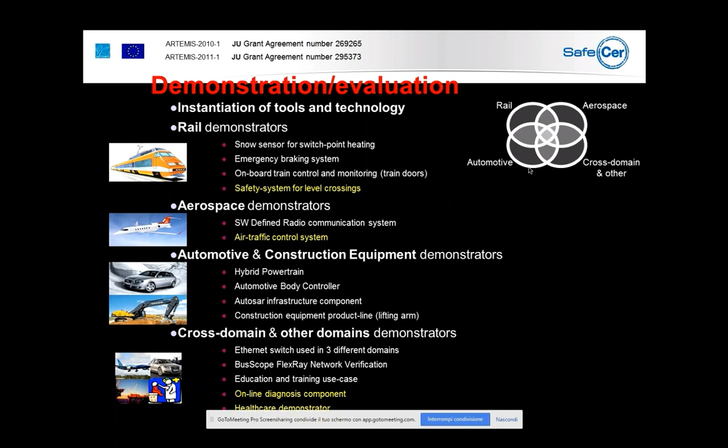I have a question - you said that the tools, CTF and CAR, are not going to be part of the AMASS project, and won't be included as background. Yes, that's right.

Because we think that the results obtained in the SafeCer project were not, I don't know how to say, but we think it was not sufficient or enough results about these two technologies in order to elaborate some improvement or adaptation in other frameworks. I don't know the opinion of the others, but we have alternatives to provide tool support for traceability or process compliance and consistency, and we think we can go with other solutions.

Okay, it was just to clarify it. Okay.

I don't know if the other SafeCer partners want to add something about this aspect, because I understand that SafeCer had an important role here, but I think it has also been discussed during the AMASS proposal that CTF and CAR will not be introduced or added as a baseline for the AMASS reference architecture.

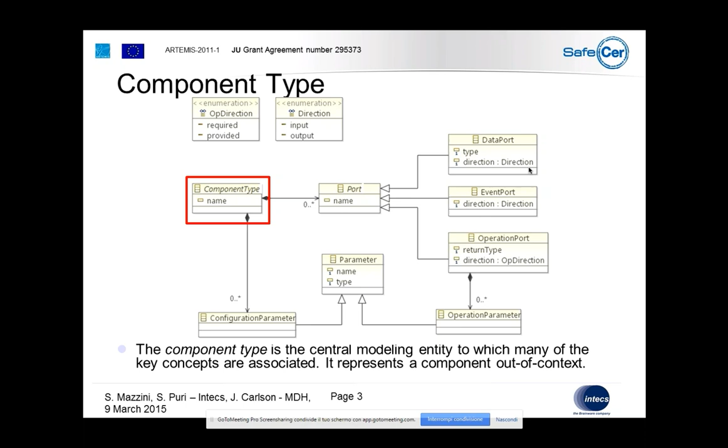Here we have defined that the component can have ports. This is important in order to be able to model a component out of context. Each port represents a specific interaction point. And then the component can have some configuration parameters in order to model some variability in its functional dimension.

Then we have the concept that a software component can be decomposed into subcomponents, where subcomponents can be seen as an instance of a particular component in the context of the parent component. So, for instance, here you can see that a composite subcomponent, which you can think of as an instance, can have some value for the configuration properties we have seen before, in order to fix some variability that has been provided through the configuration parameters of the components.

And then the subcomponents inside a given component type can be connected between them by using the defined ports. In the component model, we define the concept of system, which is basically the system under design, made by the software and the hardware platform.

We also address the fact that the system can be modeled at different abstraction layers. So, for instance, the system at a higher abstraction layer can be defined as a collection of functions, where each function can then be realized by a given component.

Here in this slide, we see that actually when we talk about component system, we talk about component instance. So, as I said before, the system is designed by reusing existing components defined out of context. So, in order to build the system, you take the component type, instantiate it, and connect the different instances together in order to build the software for the given system.

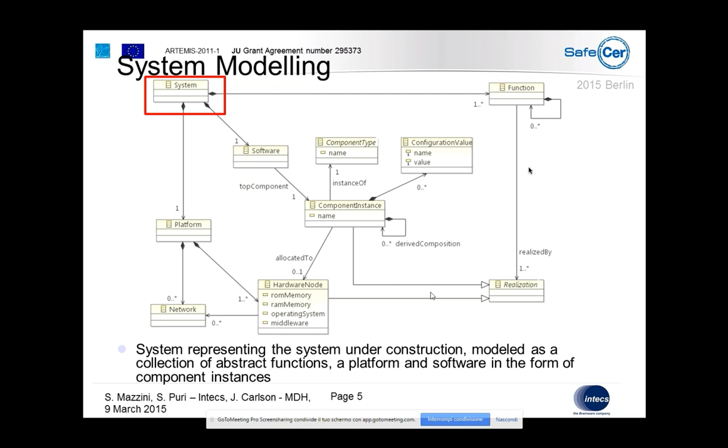In SafeCer, we made a distinction between strong assumption contracts and weak contracts.

So regarding strong contract, if a component has a strong contract, then in order to instantiate a component in a system, the strong assumptions must hold in order to use the component. So the assumption makes some constraint about the environment where the given component can operate. If the assumption provided to the contract are not satisfied by the given environment, then the component cannot be instantiated in that environment.

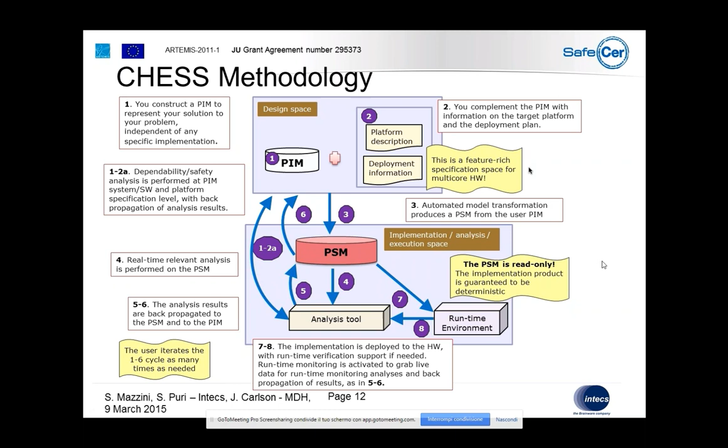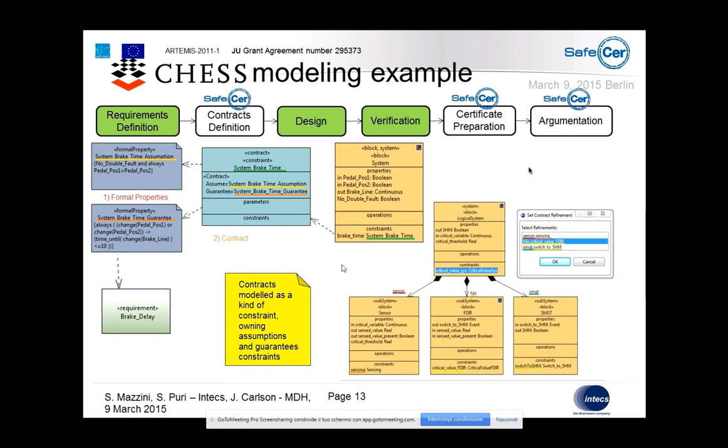And so we support different modeling steps. And also in SafeCer we added the possibility to integrate with the OCRA tool from FBK in order to perform some formal verification from this contract. About this verification we will see in a presentation later.

So the idea here in CHESS is to cover all the process steps foreseen by the SafeCer process, which besides the standard process steps, foresees other process steps for the contract definition and also certification argumentation preparation. And so our approach is to use this tool in order to support all these steps. Okay, then we had future work in order to extend and make more formal reasoning about the contracts and the argument fragment, and so this is something that I think is also very interesting in AMASS.

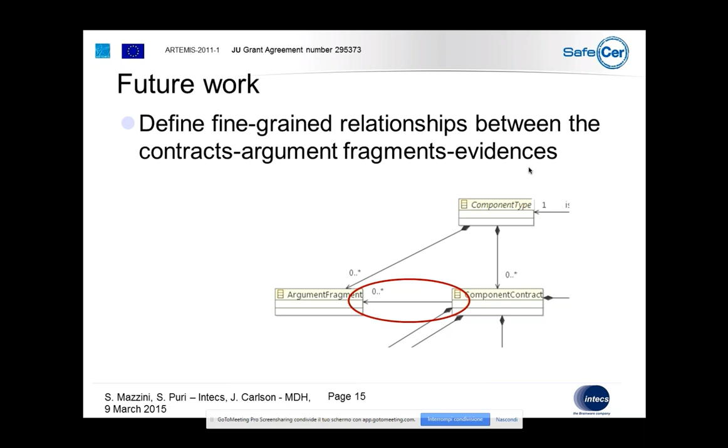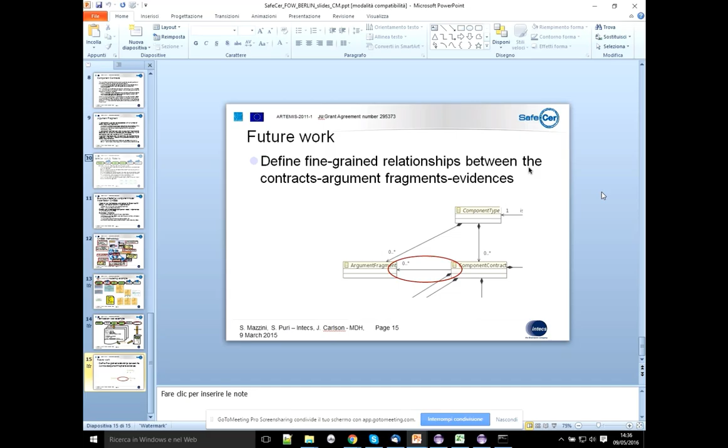Hello? Yes, this is Wesker. Just to understand your approach for implementation of this meta model, what I understand is that this meta model is your conceptual model, right? It's not the way you exactly implement it. Because you say that you implemented CHESS, and I understand that chess is based on Papyrus. Papyrus uses the profile mechanism.

Yes, right. In fact, they say the SafeCer component model is a representation of the information needed. Then, in order to work with it, we rely on existing component models. For instance, the one we have in chess, which has been extended. That is, as you said, based on UML and MARTE profiles. Other component models were used in SafeCer in order to directly use the SafeCer component model. So, for instance, in chess, or the way you use chess in SafeCer, have you extended the existing profiles?

You say that you are using the Marte profile. Yes, UML, but Marte. Have you extended Marte? Have you modified these profiles, or are the existing profiles okay for you, or do they cover your conceptual model?

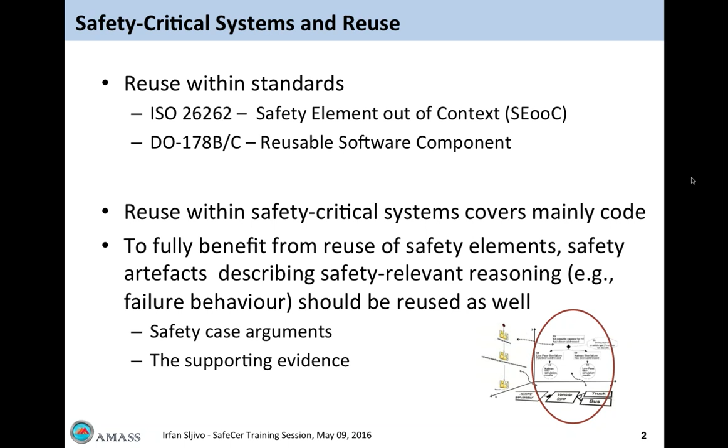If we take a look at the example that we worked on within SafeCer, safety element out of context within wheel loaders: we had a family of wheel loaders, and each of those wheel loaders has this lifting arm that can perform up and down movements to move load and so on. Because it's a great family of products, these products work in many different environments and have many different safety requirements associated with them. So we considered the use of this lifting arm automatic positioning software component, which as an operator you press a button and then the arm will go to a predefined position.

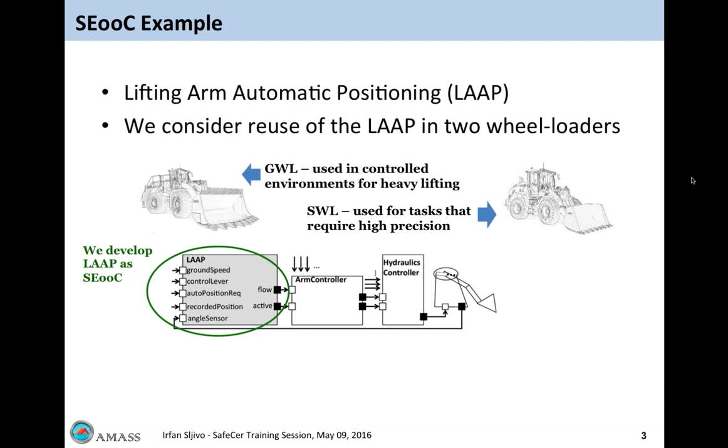So if we want to develop this component as a safety element out of context, what the standards say is we need information related to the system design, and the functional safety concept shall be assumed, considered, and validated. So it means that we will make some assumed safety requirements based on what we know about where this component will operate. We will consider those assumed requirements when designing our component, and once this component is being reused in one of the systems, then those assumptions need to be validated in order for the component to be able to integrate into the system.

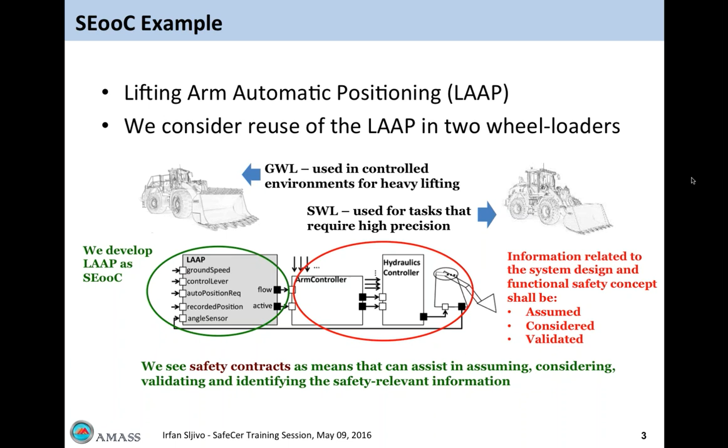So to achieve this, we see safety contracts as a means to do so, to capture what we assume, get the guaranteed behavior based on those assumptions, and then later use the contracts to check if those assumptions hold when the component is reused.

When we look at these out-of-context reusable components, they're developed independently of the system, but they're also developed with configurable parameters, which means they have different behaviors based on the values of those parameters in different systems.

That's why we have, as Stefano introduced, this notion of strong and weak contracts, where strong contracts are the ones that should be satisfied in every system, in every context, while the weak ones are context specific—only when required are they needed to be satisfied.

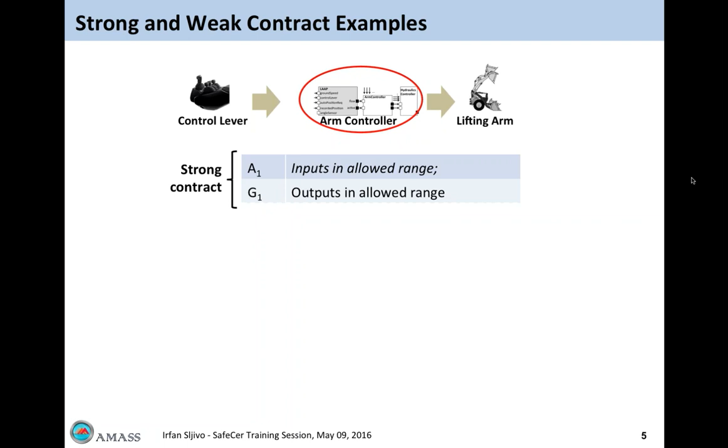If we take a simple example based on this lifting arm automatic positioning component, the strong contract could be that inputs are in a predefined range. So you always expect the inputs to be in that range, and the outputs as well.

But if we talk about weak contracts, those not supposed to always hold, we go into something more specific and talk about the accuracies of the inputs. This weak contract says: provided that the angle sensor accuracy is this much and the actuation deviation is this much, then I can guarantee the stop position of the arm movement is within this range.

So we can have this range of different contracts for different scenarios, for different contexts, based on the assumed requirements we consider when developing this component.

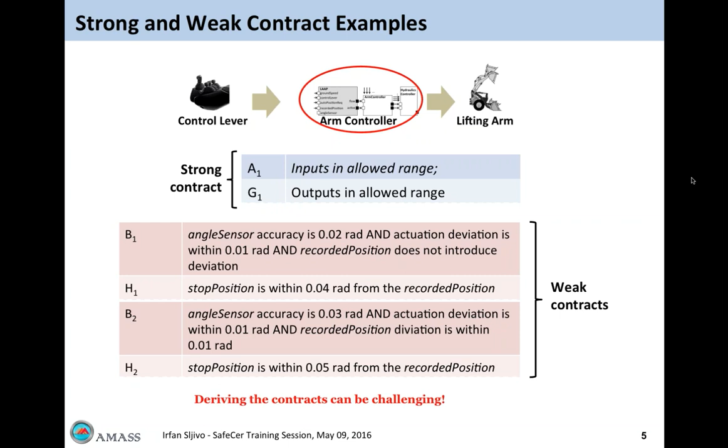But the difficulty here is how to derive such contracts, how to derive useful contracts. So we worked on means to do so. The basic thing when capturing these contracts for reusable components is we want them to have safety relevant behaviors.

Such that we can say, provided that this behavior or this contract is met, then the corresponding safety requirement has been met. So we need to capture behaviors relevant from the perspective of hazard analysis.

If we look at the ISO 26262 lifecycle, there are different techniques we can use in hazard analysis and risk assessment.

One technique we have used for derivation of contracts is fault propagation and transformation calculus, because it's a compositional failure logic analysis technique, which means we can consider failure behavior of components in isolation, establish their failure behavior in isolation, and then combine that behavior to calculate the behavior on the composite or system level.

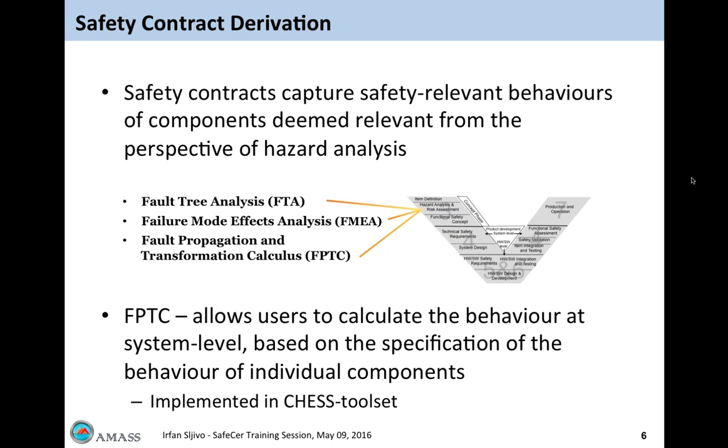This FPTC technique is also implemented in the CHESS toolset. So we've looked into how we can get contracts out of this FPTC analysis.

Let's say we have this out-of-context component. We specify its behavior in FPTC rules. For example, here we have this component C, which has two inputs, I1 and I2, and one output, O1. Two rules for this component could be: provided that I1 is late and I2 is late as well—meaning they come later than expected—then the output O1 will not exhibit failure, meaning this component can handle inputs being late.

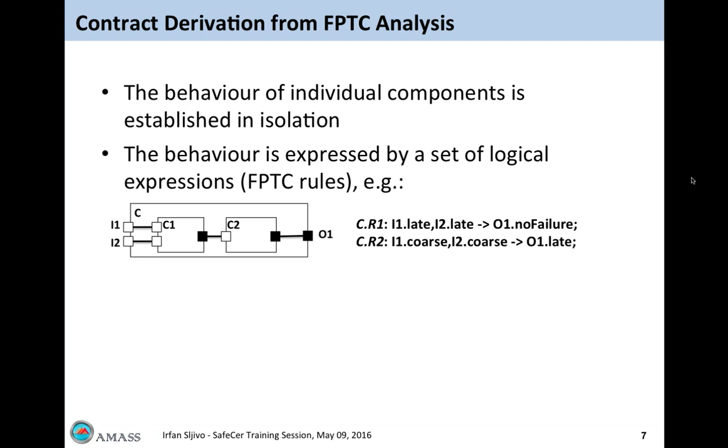But if both inputs exhibit value coarse failure, which is considered a gross, significant value failure, then this component can't handle it, and it will cause late failure on the output failure mode.

So if this is the failure behavior specified for this component, we look into how we can get contracts out of this. What we see in these rules is that some describe mitigation behavior—techniques within the component—for example, here that the component can mitigate late failures.

But some other rules describe behaviors that describe when the failure happens—like the second example rule. Based on that, we can derive these contracts.

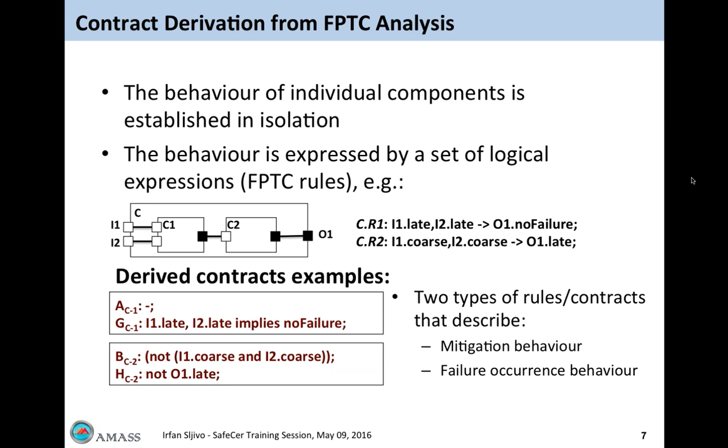One contract guarantees that the component mitigates certain failures, and another weak contract says this component will not be late, provided that the environment does not provide value coarse failure on both inputs. So this second contract is not always required to hold, but if in a certain environment you want this component not to exhibit late behavior, you will need to fulfill these weak assumptions.

Having these contracts, we need to see how we can use them for reuse and how we can use them to reuse safety artifacts and generate argument fragments from them. A basis for that is the SafeCer meta model.

We did an extension of this meta model and focused only on the out-of-context setting. What does that mean? We consider a component as a composition of assumed safety requirements when developing the safety element out of context, the contracts that we derive to satisfy the requirements, where the contracts actually describe actual behavior of the component, and the support of contracts with evidence. So this component incorporates not only the implementation, but also the safety behavior around it.

Now, when we have this component meta model, we need to see how to get out of this meta model these argument fragments that we were talking about. Basically, in those fragments, we would like to say that these requirements are satisfied.

The satisfaction of the requirements can be established by looking into the satisfied contracts' guarantees. So what the contracts guarantee should imply the requirements.

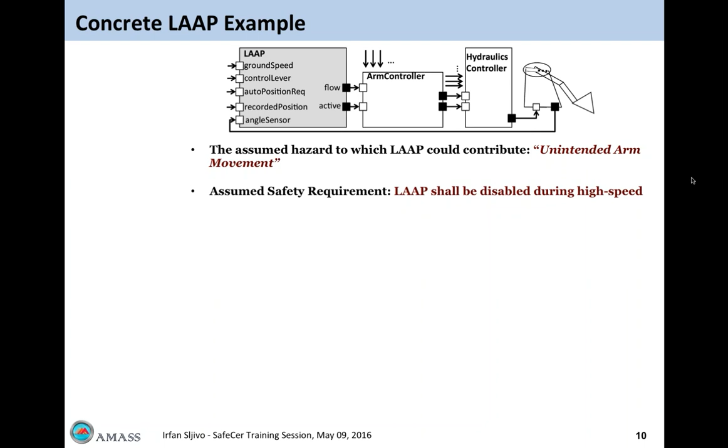So if we have a contract saying ground speed should be between 0 and 200 kilometers per hour, and there is a parameter of this component saying ground speed limit, which is up to 20 kilometers per hour, then the guaranteed behavior of the component is: when the ground speed exceeds the ground speed limit, the component will go to default or disabled output, indicating it's not active, and it will return flow, which is the movement of the arm, to 0.

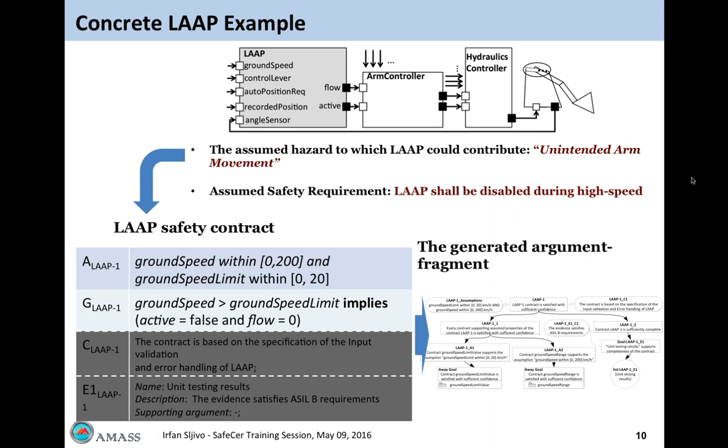And we attach to this contract some strong context statements and evidence supporting this contract. When we have this, we can generate an argument based on what we said an argument should look like. Let's see a fragment from that argument here. If we take a look at the first top claim, that the contract is satisfied with sufficient confidence, we're covering here only the third part of what an argument should consist of.

So sufficient confidence in the contract is implied by the fact that its assumptions are sufficiently satisfied by other contracts. That's number one. And then that we have confidence that the contract is sufficiently complete, that is, that we haven't missed any assumptions.

So on the side of assumptions, we go for each of the assumptions in the contract. We need to show and point to the actual contract that satisfies that assumption, and we can point to it as an away goal, saying this is okay, done, and covered in another module. This is a GSN representation of the argument.

Once we have covered that all assumptions of the contract are satisfied and we are confident they're satisfied, then we need to cover that the contract is sufficiently complete, meaning we haven't missed any of the assumptions. We do that in the second part, saying the contract is sufficiently complete, and we attach solutions to those goals. So this is an example of how we can get an argument fragment from the contracts and the information related to them.

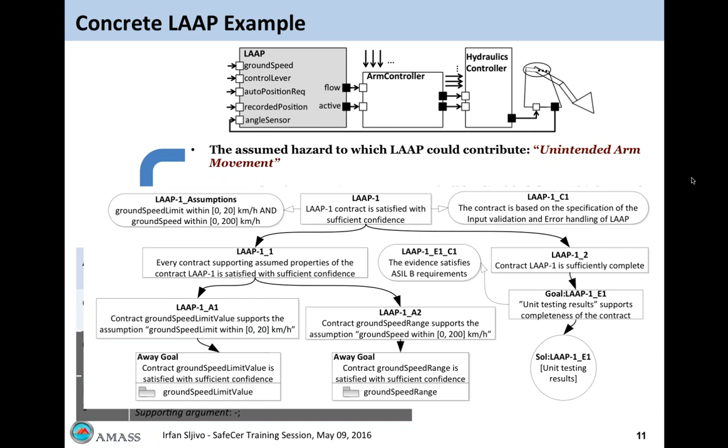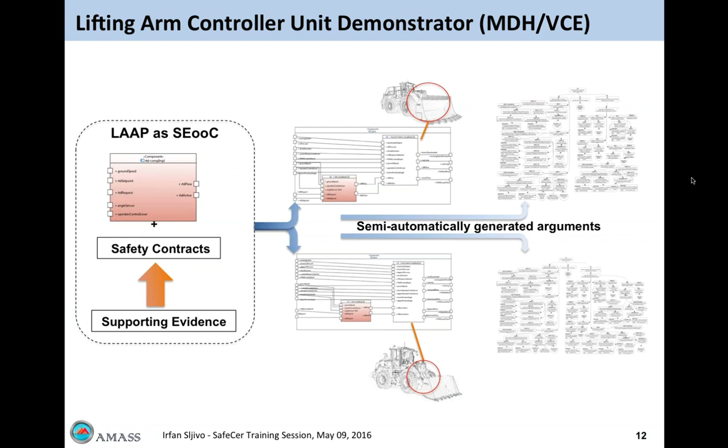So we did this on this loading arm automatic positioning. We reused this component, developed it as a safety element out of context, attached contracts to it and evidence, and reused it in two different systems. These two systems are modeled in CHESS, both. And then we derived some arguments for those.

If you look at these arguments, we can see that one part of the argument is the same in both cases, and that's the part derived from the strong contracts. We consider them common between all the different cases in which the component can be derived, because strong contracts should always be satisfied, right?

But the second part varies between different systems, so that part is system specific. It's basically composed of small fragments for each of the satisfied weak contracts. Since not all weak contracts need to be satisfied in all systems, this second part is specific to each system. So it includes certain commonalities and variabilities between the different products of the family of products, the product line, of wheel loaders.

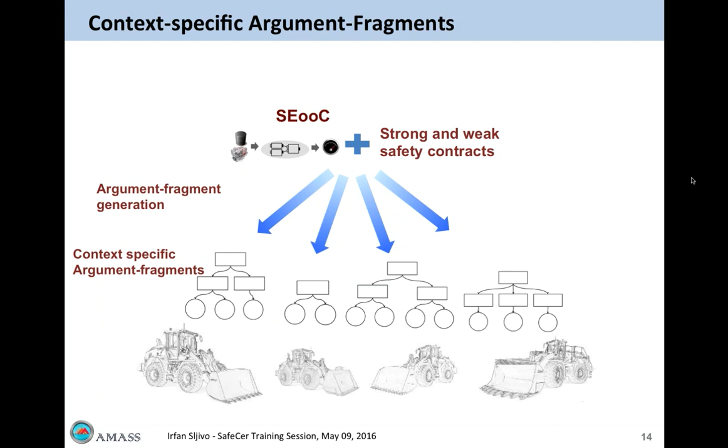So basically with these weak contracts, for a safety element out of context enriched with them, we can get different context-specific argument fragments that include only relevant information for that particular context, filtering out the weak contracts that are not relevant for a particular context or product, making the argument clearer in the end.

Okay, so that was the presentation on the generation and reuse of argument fragments based on the safety contracts. If you have any questions.

Just a question for the contracts, is it tool supported? Yes, you can specify them in the CHESS toolset because it's integrated with OCRA as well.

Okay, so not fully, of course, because there are certain differences between the implementation with strong and weak contracts and those with ordinary contracts, let's say. And I don't think we have currently implemented these parts in CHESS for generation of arguments or connecting evidence and so on. But most of the things we talk about can be cast to OCRA, let's say, and used through OCRA.

But I think we can check as well with Stefano later on from FBK on their example. We've worked as well on the generation of argument fragments. We worked on generating argument fragments from FPTC directly. The next step, and we have that part implemented, but the next step would be to go and implement that part from safety contracts to argument fragments as well.

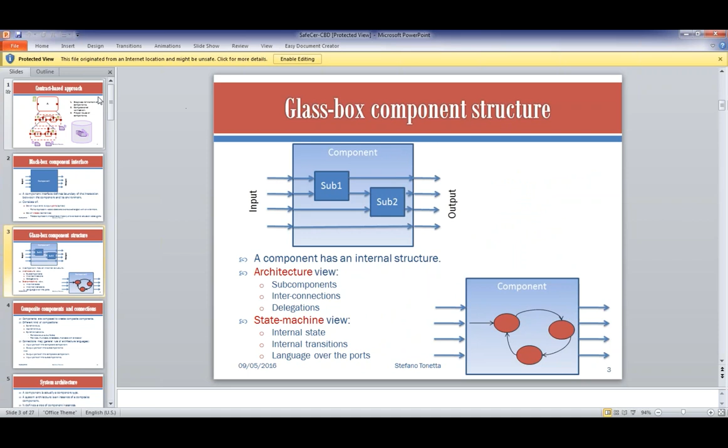So the components are described with... Stefano? Sorry, yes, I see the first slide of your presentation, still the first slide. So maybe is the problem only for me, or? Can you see my slides? You cannot see my slides? The first one. Yeah, for me as well. It was the first contract-based approach. Well, it's the first one. Yes, okay, you cannot see. Yes, indeed, I have some slides here. Oh, okay, maybe I can try it like this. I will not use the presentation mode, otherwise I have some problem. Okay, thank you. Now you can see the second slide, right? Yes. Okay, sorry about that.

So the components can be seen as a black box described with the interface in terms of the input and output ports that define the boundary of the components. The boundary—so whatever is outside is the environment of the component, and whatever is inside can be seen as the implementation of the component.

And the semantics of these components is described with traces, also called execution traces, that describe the evolution of the component along time as a sequence of events or values that you can see on the input-output ports of the component.

So when you open such a black box, you can see the internals of the components, and you can decompose the components into subcomponents, or, if you are in a leaf of the system architecture, you can describe the behavior with a behavioral model like a state machine.

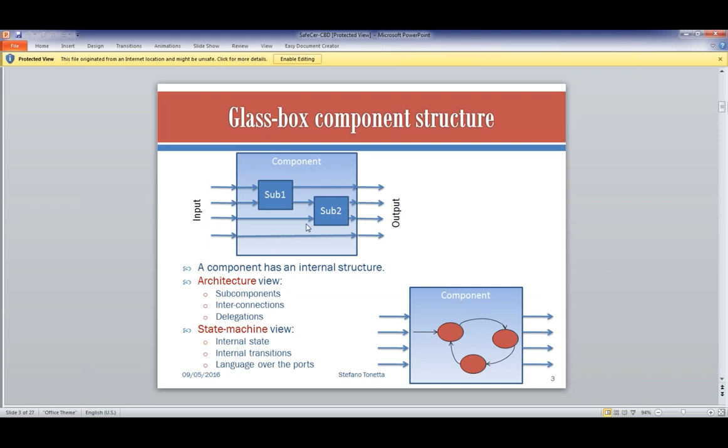So when you have a composite component like the one on the left top part of the slide, the behavior of this composite component is given by the composition of the behaviors of the subcomponents. You have different kinds of compositions available: synchronous, asynchronous, or they can synchronize on some events. These are very important when you analyze the architecture with formal methods in order to define which is the proper semantics that you are considering.

And generally, you connect the ports of subcomponents with connections that link, for example, input port of some subcomponents to output port of other subcomponents, to input port of other subcomponents, or to the output port of the parent component.

So in these settings, a system architecture can be seen as an instantiation of a composite component that defines, based on the iterative definition of the composition, a tree of component instances.

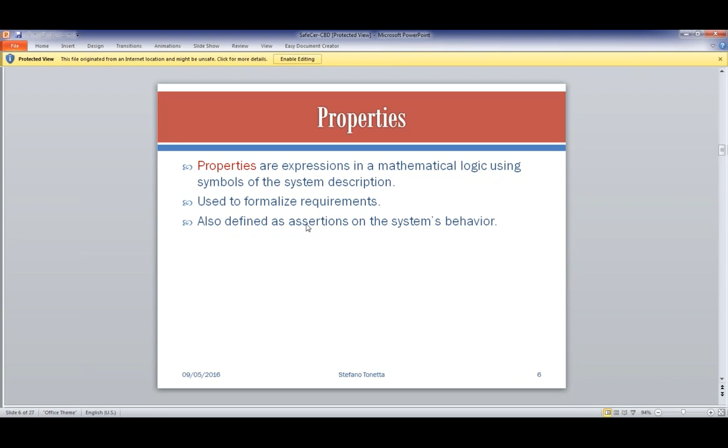The properties here—we have seen different kinds of properties. We've seen a meta model talking about properties. We have seen some properties described with a textual version. Here, the properties are meant to be mathematical expressions that describe how the behavior, how the system, the component can behave. So this property can say if an execution trace is good or not. They are also called assertions.

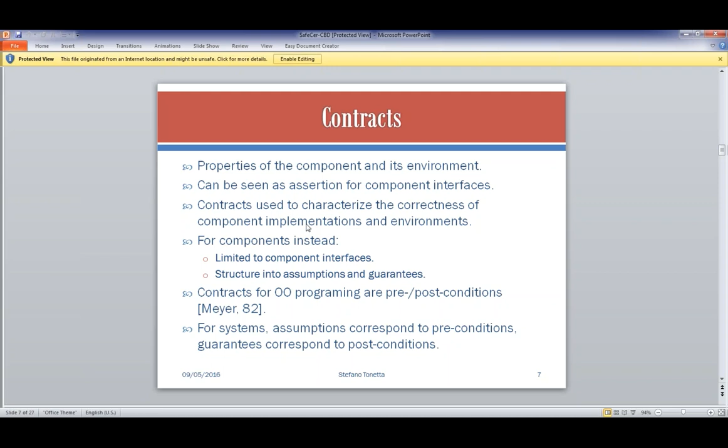And so we arrive at the notion of contract, which can be seen as a pair of assumption and guarantee, and each assumption and guarantee is a property defined in this way. So they are actually properties defined over the component interface, so they are restricted to the component ports, and they are structured into assumption and guarantees that play the same role as pre/post conditions in the classic contract-based design that you can study in object-oriented programming.

So when you have this kind of properties, the assumption is a property that must be satisfied by the component environment. So when you perform analysis, you will make sure that the component environment satisfies such an assumption. And the guarantee instead is a property that the implementation—however you implemented the component, whether with other subcomponents or with a behavioral model—must satisfy, provided that the assumption is satisfied.

So whenever you decompose a component into subcomponents, you have a contract specified at two levels of the hierarchy. And so you would like to ensure that this decomposition is correct based on the refinement of the contracts, based on the contract specified at the two levels.

So we have a formal notion of this. We have a precise and rigorous notion that defines what this refinement means. What do we mean when we say that this refinement is correct? This is given by the following.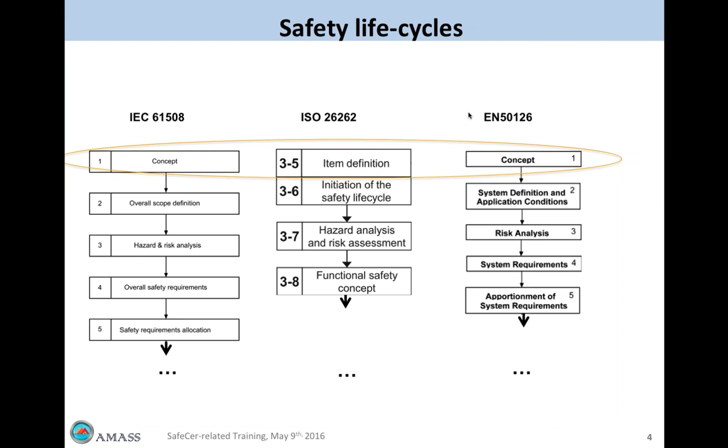And as you can notice, just looking at the first row of these three aligned safety life cycles, we can see that all of them require the concept to be defined. And if you keep on reading, you will find other commonalities, and these commonalities are at the big box level.

So before entering into the details with respect to what to do with these commonalities and how to treat the variabilities, let me recall what a process is, because in reality the standards do not necessarily impose a process, but suggest a life cycle, which is different from a process.

It's up to the process engineer to read the standards, read the methods that are suggested, read the activities that are suggested to achieve the objectives, and then organize all the activities, select the methods, establish the responsibilities within the organization, etc. So the process is typically defined as a set of partially ordered tasks that have to be executed to develop systems.

Okay, so depending on the granularity, steps can be grouped into tasks, tasks can be grouped into activities, activities into phases, and finally you have a process.

But not only the breaking down of the work, but you also have to remember that you have requirements on roles, you have requirements on guidance, you have requirements on tools, etc.

Then, if, like in this case, you have processes that exhibit commonalities, you may start talking about a process line, so a family of processes that exhibit commonalities.

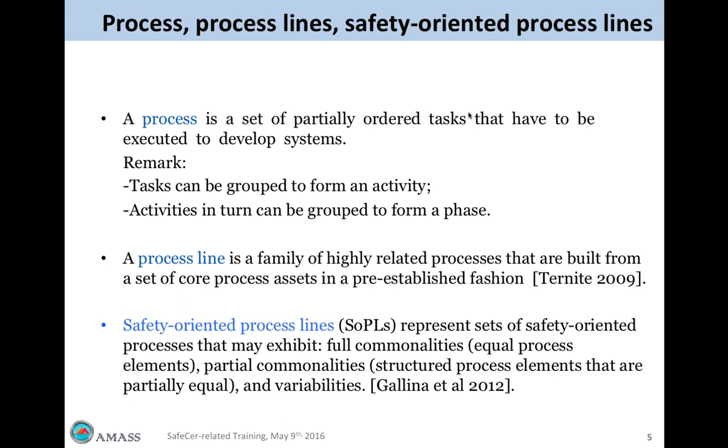So you're interested in having a finer granularity and determining the partiality in terms of commonality.

So what we did was take standards for comparison. In one case we took two standards, in other cases three standards, depending on whom we were working with. And we started a comparative work, like in product line engineering, comparing them.

So first of all, deciding on a common terminological framework, we took SPEM 2.0. Then we tried identifying activities, tasks, work products, guidelines, etc., all the process elements, while reading the same portion across the set of standards we considered.

Then we started identifying what was similar and what was different. And when we found differences, we wondered: is this difference relevant, or just a terminological difference that we can overcome because they used a different syntax? Is this ordering difference crucial? Is this grouping difference crucial? We asked ourselves all these questions, and discussed them with the industrial people.

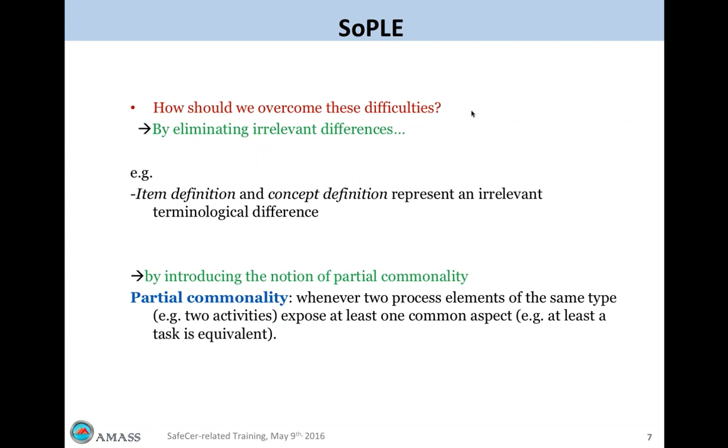So, to overcome these terminological differences, for example, in some cases we decided to propose terms that were more abstract with respect to the standard-specific ones.

Then, once we had identified these commonalities and variabilities, we started thinking it would be of interest to model such a family. And what is at our disposal? Is there already a modeling language that could be used, possibly tool supported? We noticed that tool-supported, ready to use, perfect languages are not there.

There is anyway SPEM 2.0. There's another language with no tool support currently, called vSPEM. Since there was no tool support and we wanted to be pragmatic in SafeCer, we considered SPEM 2.0, also because we had the coverage and tool support with respect to the modeling elements we were interested in, and we noticed we had, even if not perfect, support to model variability.

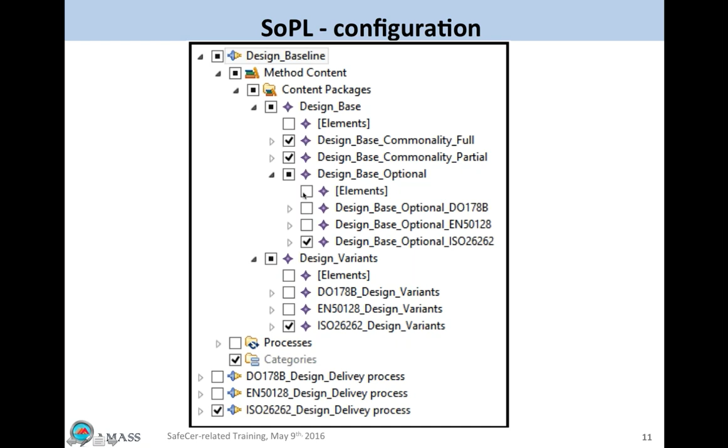Now, if you have a model of your process, or a model of your process line, you can think of using GSN, for example, or claim argument evidence, which are both concrete syntax for SACM, the Structured Assurance Case Meta Model, another OMG standard for arguing about safety. You can think of using GSN to argue about process compliance.

And the reason why among CAE and GSN we selected GSN is that GSN has already been extended to support product lines, and we can use these modeling elements for process lines too, because you have the alternative, you have the optionality, so there is support, even if not perfect.

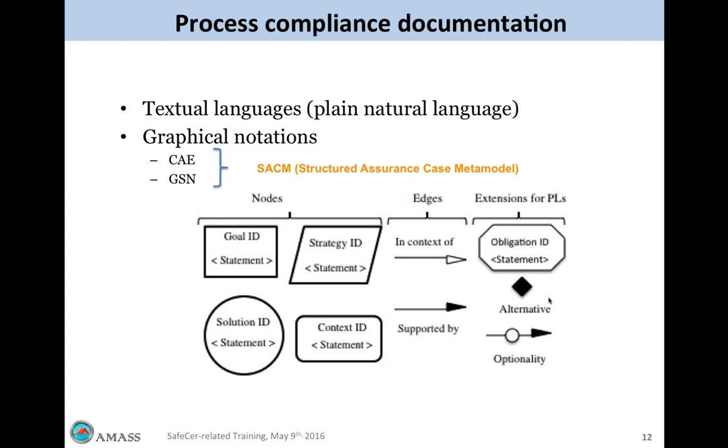So again, we put on glasses with respect to lines in order to see families all over the place. And not only do we see the families among the processes, but we start seeing the families with respect to arguments that argue about process compliance. And we also use model-driven engineering principles.

The method that we suggest is as follows: either you work at the line level and engineer the domain, so all the process elements, and then derive an assurance case line semi-automatically; or from a line of processes, you derive in EPF the single process, then from the description of the single process, which can be exported from EPF Composer in XML format, you can use that input to generate semi-automatically a process-based argumentation in GSN.

So behind the scenes, there are model-driven engineering principles. But to work at the line level, we are not ready yet. We can do that on paper, because the extension for safety-oriented process lines in terms of languages is not there, and also the extension in SACM for modeling in GSN, for meta modeling in terms of optionality, alternative, etc., is not there.

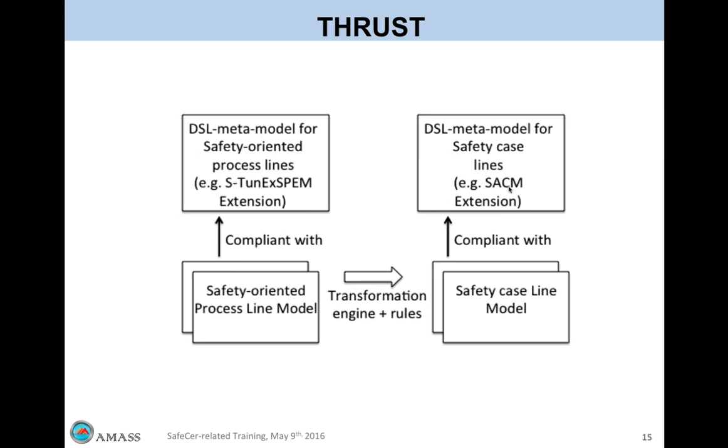So what can be done, to be pragmatic, is that we consider as a meta model SPEM 2.0, and we consider as a meta model the current version of SACM. We model a process in compliance with SPEM 2.0, and from such a model we use model transformations. We have rules, and we can generate semi-automatically a process-based argument.

An example that is on paper but has also been implemented: if you have a simple task related to hazard identification, with a role responsible for identifying hazards, you know that you have used the FMEA package to perform hazard analysis, and you know your output, and which FMEA template you have used. You can always think of generating semi-automatically an argument about that, which is in compliance with a specific standard.

And of course, this argument could be improved in various ways, but what we have shown is the possibility to do this, and the potential that we already have supported. So it's a prototype solution.

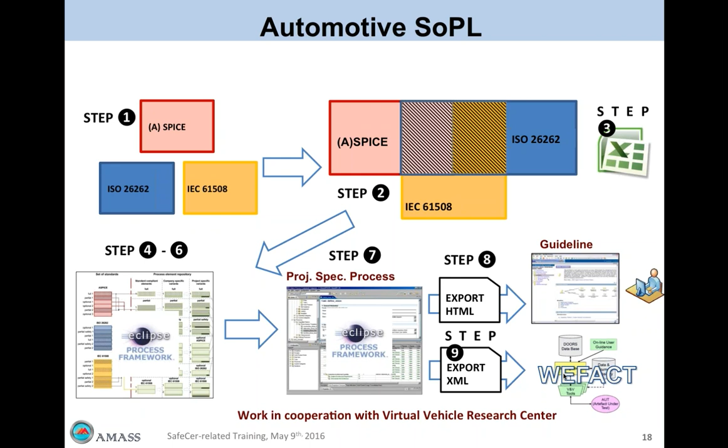So with respect to future work and exploitation of this background within AMASS, there is already post-SafeCer work that extends safety-oriented process line engineering towards security-informed safety-oriented process lines.

And we are currently cooperating with Newcastle University, as Irfan said before, to implement a model transformation aimed at generating argument fragments. Such implementations are also expected to be adapted and integrated within the CHESS toolset, continuing the work within WEFACT.

So I'm done. I thank you for your attention, and if you do not have questions, we move to the following presenter. Let me know.

Thank you, Barbara. I have a question. Please go ahead.

Did you mention something about SPEM 2.0? But EPF is only supporting 80%. EPF covers 80% of it. EPF is not a SPEM 2.0 implementation. They have a different meta model, but they guarantee 80% coverage of SPEM 2.0.

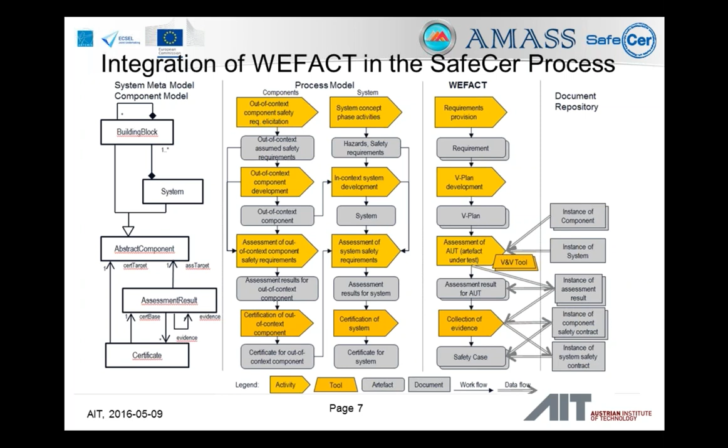WEFACT starts from requirement definitions. Then the V-plans are developed, meaning which activities can prove that the requirement is really fulfilled. Then the V-plans are conducted, they're performed, and deliver results, pass or fail. And all these results from V-plans are collected and provide the evidence for the safety case or for the safety certification. As I mentioned, it's all focused on safety, but we will try to include security and within AMASS also other quality attributes.

The integration of tools in WEFACT is used for testing, analysis, and whatever step is needed to prove that some requirement is fulfilled. We can distinguish 5 different kinds of tools. An internal tool is some tool that's started directly from within WEFACT. One example could be a checklist, some table in Word, directly called from WEFACT. We use this as an example for the hazard log in the railway domain in SafeCer.

Next category of tools is manually executed external tools. The DCASE editor is one of those tools. I will show more about it later. Then a tool can also be executed automatically external. OCRA, for instance, was such a tool. It was started externally by a tool server, but triggered by WEFACT.

Another relatively novel kind of binding is the OSLC automation provider. It was also used in the use case, the DTFSim use case. The tool started via OSLC automation provider. And finally, we have the totally external test bench. An example would be an electromagnetic interference hardware test bench, which cannot be coupled directly, because there must be some operator who puts the device under test into the machinery and measures it and imposes some electromagnetic field, etc. So this is quite separate.

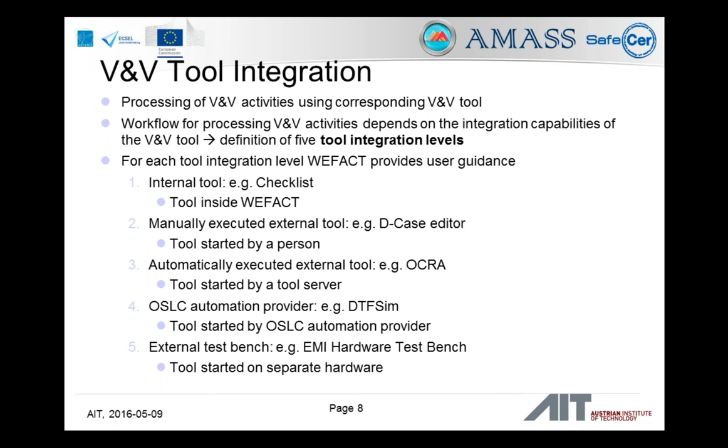In any case, the results are fed back into WEFACT. Documentation support is provided by WEFACT, of course. The idea is there's a certificate on top here, or a safety case.

And of course, you get validation reports as an input for the safety case. The validation report comes from different kinds of detailed reports: review reports, formal proof reports, system analysis reports, test reports, etc. All these are collected in the validation report. So the idea of WEFACT is essentially to keep an overview of all kinds of reports and validations needed to have a final proof that the system is safe.

Here we see a short example for a validation report. There are different V-plans executed, and for the platform independent model, I think, the SCADE model. At the end, you get a report in a defined format, and of course one of the fields must be the result: pass or fail. Yeah, here it is.

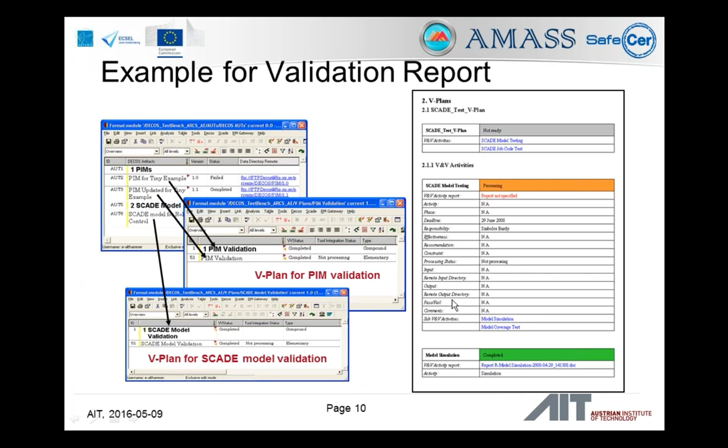A short summary of the features of WEFACT: WEFACT supports V&V and certification processes. It relies on standards, COTS components—concretely IBM Rational DOORS—but we want to go towards Eclipse, as I mentioned. WEFACT integrates with external systems, tools, and processes, and provides support for establishing safety cases.

Now we come to the DCASE editor integration. How is this done? First, you draw your GSN structure in DCASE editor—could also be done the other way around, of course. Normally, you start drawing your GSN argumentation in DCASE editor, then import it into WEFACT and integrate it within the WEFACT database, linking it to appropriate V&V activities and requirements in WEFACT. So it's a basic process, and not much more detail about this.

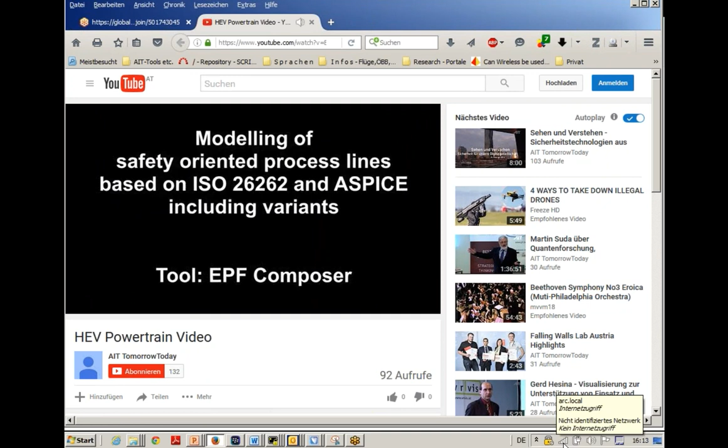The problem is I have no sound now, I don't know why. Can anyone hear something? I suppose no. No. Thomas, we can hear you. We can hear you. Okay, so obviously my sound has been captured. No, but we cannot hear the video. Yeah, but I see, yeah.

In the worst case, the link is there, and recording a recorded video is not necessary, I mean, it's already recorded. I had also provided that link, you are providing that link also, so if we do not succeed in recording an already recorded video, you are not missing that much.

Okay, I suggest if you are interested, just click this link here in the slides. I provide slides on the AMASS website, on the CN, and you can just hear it. Obviously, it does not work in parallel to the GoToMeeting, because GoToMeeting captures the sound. I don't know.

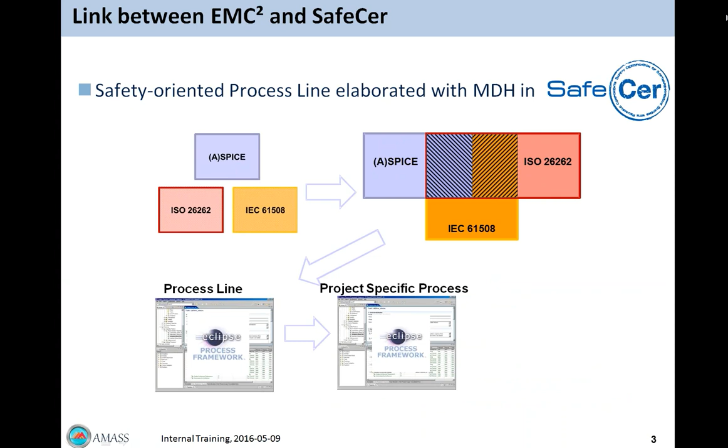Our approach in the EMC Square project concerns a methodology to provide argumentation based on GSN. Our approach is that the argumentation is part of the process. We have a safety project-specific process, and this process already has the argumentation methodology included.

We have defined two different argumentation paths: on one hand the process-based argumentation, and on the other hand the product-based argumentation. The process-based argumentation is directly related to the process. It is suitable to argue that all requirements concerning the engineering process are fulfilled, and in the end it supports process and functional safety audit. In other words, we provide argumentation about the process for this audit.

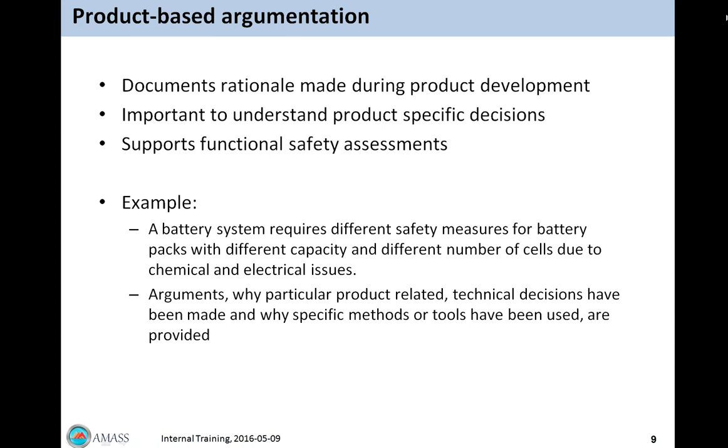On the other hand, we have product-based argumentation. It is intended to document product-specific decisions within a project. In the end, it supports functional safety assessments. Okay, this is quite short about this process argumentation.